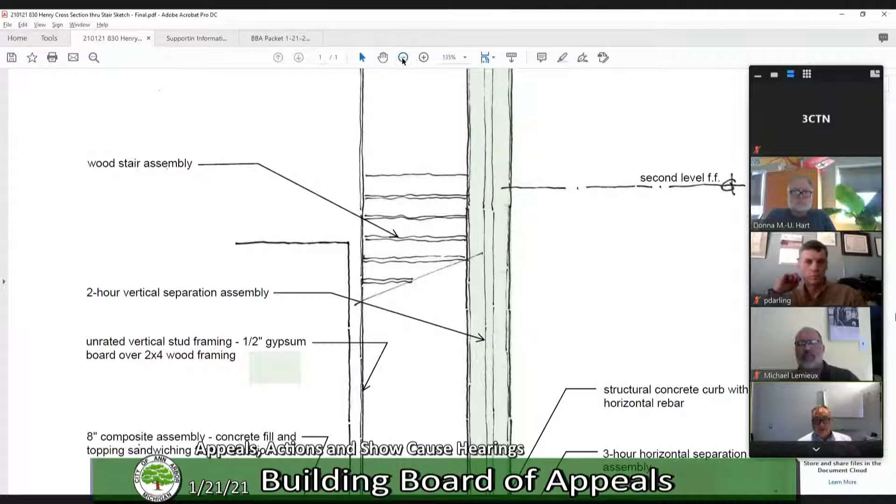Without getting into the rest of the floors or diagrams, we can talk off of this for the most part because it's relatively straightforward. There's a stair on the lower half of the drawing going down to the lower level, which is the basement or garage level of the development. That's where the sleeping areas, the bedrooms of this particular unit, are located. There's 3 bedrooms and a small common area associated with this. The primary egress path is through the stair to the main level. The upper stair goes to a rooftop terrace.

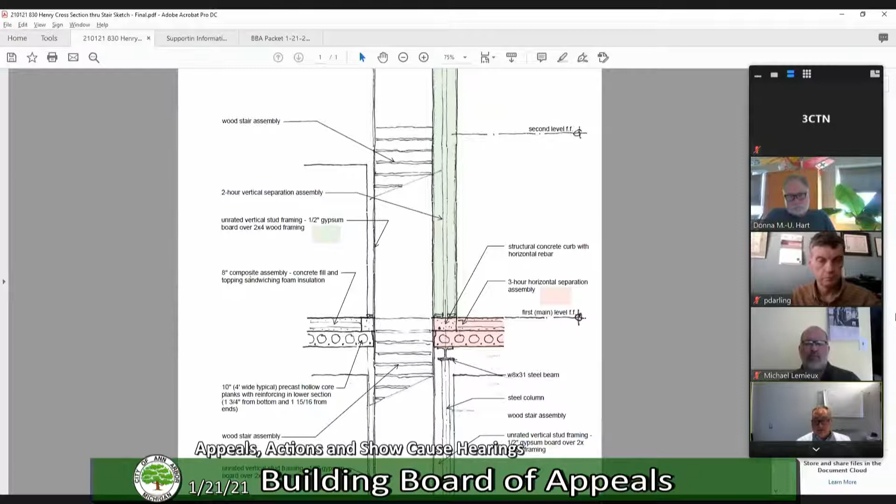Regrettably, both were constructed with incredibly tight construction tolerances, and that's where I want to spend a little time reviewing and discussing them. Basically, this unit is separated from the garage level and upper stories by a 3-hour separation assembly. In regards to the vertical separation between it and the garage, it's a 3-hour cast-in-place wall. In regards to the horizontal separation, it's a 3-hour precast and composite cast-in-place system that in effect creates a fully sandwiched type system.

That's a 10-inch concrete plank, which is the primary structural floor system. The stair basically runs between those planks, and then what we call the topping course—2 layers of cast-in-place concrete which sandwich an insulation layer between them—is spread throughout the entire floor plate system itself.

There's also a curb at either end, both to frame the opening itself and to support and provide bearing components for what you see on the right hand of that image, which is a 2-hour vertical separation assembly—a consistent separation design that separates all of the individual units, including unit 11 in this case, from unit 10.

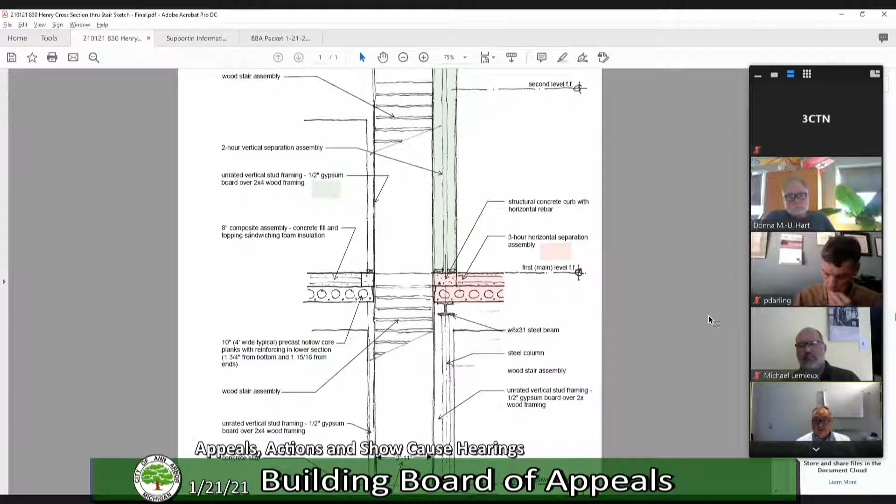On the west side, it's conventional load bearing, but not a rated wall assembly. I want to point out that this building is separated by no less than 2 hours from all adjoining properties or units, as well as the garage. The garage is clearly 3-hour separation.

To support that opening on the east side, there's the weight of the double wall construction, which is our 2-hour separation wall up above. There's a W8 by 31 beam running north to south, and columns to support that. Functionally below that level, these walls are non-structural for the most part, basically unrated framing with half-inch gypsum boards around. The upper level is a load-bearing wall on the west side supporting the terrace up above.

This drills down to the real meat of the issue at hand. The planks are a precast system. I don't know the total count, but it had to be in the hundreds in terms of what was ultimately installed on this plinth or platform that separates the garage or lower level from the beginning of the residential units up above.

This was designed with an opening with a 3-foot finish tolerance. When the planks were laid out, there was minimal tolerance after installation, and we have a condition now that has rendered this 1-inch deficient in terms of the minimum 36-inch width for both the lower level stair and the upper level stair.

We acknowledge the code concerns and the findings. There's no challenge to that effect. What I want to point out is some of the conditions that rendered this outcome. The eastern side is what we term incredibly static, meaning it cannot move based on both the plank condition, the curb condition, and the thicknesses of the walls for the vertical fire separation between those.

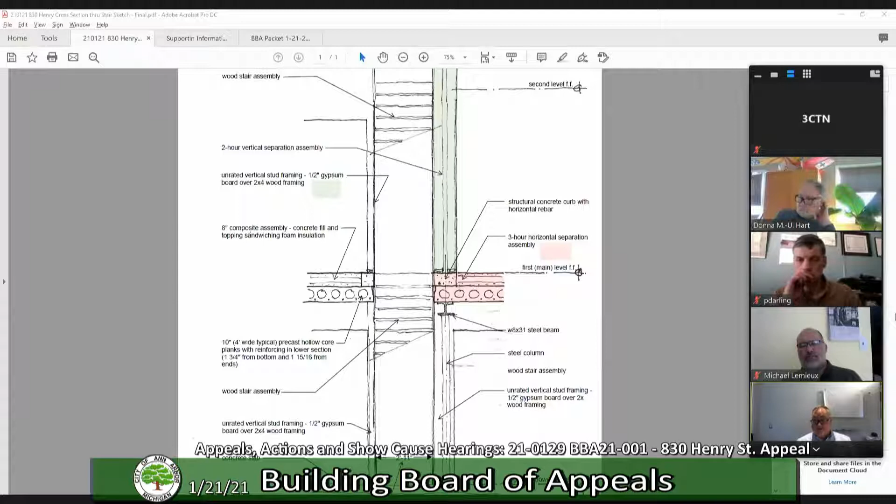Conversely, the stairs coming down from the terrace, I should point out, is for in particular the tenant use, the residential use. It's not a common terrace. That terrace likewise has that 35-inch width challenge, and it's likewise the opposite direction of travel—coming down as opposed to up.

But basically, we have a confluence of our primary means of egress to the main level, where we already have a dedicated single means of egress out of the space. So I can't imagine an emergency situation, particularly from the lower level, where there could be a set of emergency service professionals causing a conflict of two-way traffic on the stair.

I think that is the primary argument we're attempting to make, and speaking candidly as a professional, it is very unique for me to come up with a standard of approval. The one I presented as part of this application was that the provisions of the code do not apply. It was rejected, but I believe there is a tolerance inherently in the code based upon the commentary provided, an understanding if not a true variance aspect, that will allow this accommodation to take place, and that safe egressing of people from both the terrace level and the lower level can be accommodated without any deficiencies by the relatively minimal loss of the 1-inch clear dimension on that stair.

The only element of the residential code I was pointing out was a unique adaptation in the residential code, and it's only brought up for the sensibility that there's an interpretation where we could clinically eliminate, in the residential code itself, or reduce the minimum dimension beneath the handrails down to almost 31 inches, assuming a minimum 36-inch stair.

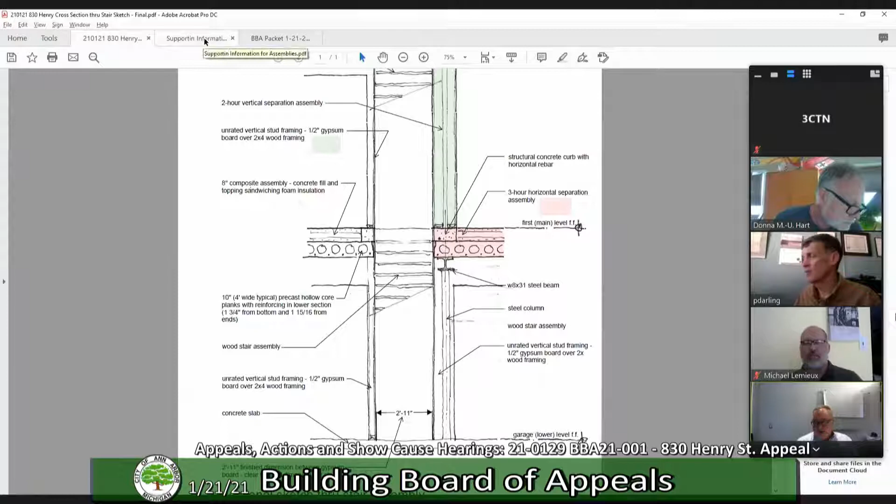Let me flip to that. That would be sheet A401, which would provide the most clarity in regards to that layout. Heidi, could you—basically, because that is a common area, it could be an area where there might be a television, an opportunity for people to just gather, but it would be the same residents as would be occupying the bedrooms. Making sure I'm not mute. Thank you.

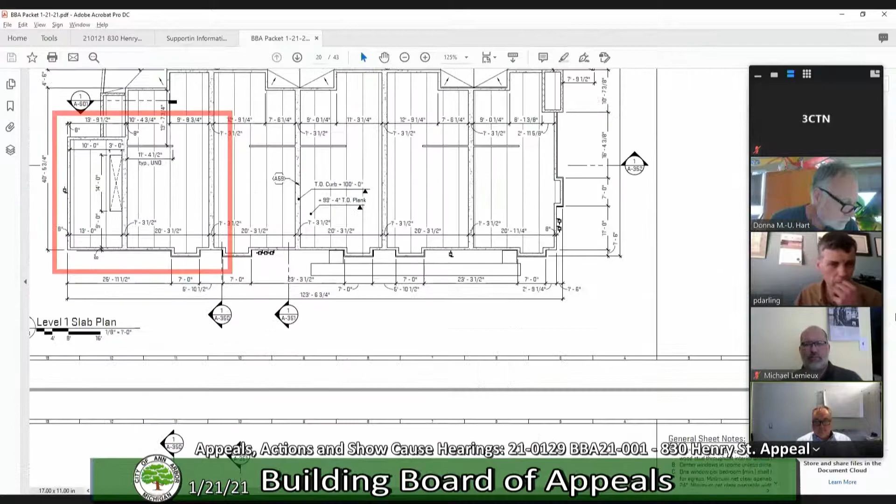If we get to 401 real quick, I believe that'd be part of the packet, please. Thank you. This page, I believe it's this page. Yes.

There's no real pretense behind the sink itself outside of potential use for a coffee pot or something akin to that. Yeah, that was going to be a wet bar at one point. That actually was not—we did not install that. Thank you, Heidi, for clarifying. That was not installed. I was going to ask if you could chime in. Thank you.

So on the same plan, the bottom of the stair shows what looks like 3 foot 4.5 clear. Is that also not the case because that's just not the way it was built? No, if you could zoom in on the bottom of the stair, I can explain the kind of on-the-fly installation that was created. I don't believe that plan took into account the column location, which functionally boxes out some of that stair. That was obviously a coordination issue during the design phase.

You'll see a dash line coming down above the stair. That line is basically a continuation of the partition up above, which forms the east side of that stairway wall. That now continues and actually comes down as handrail height down below.

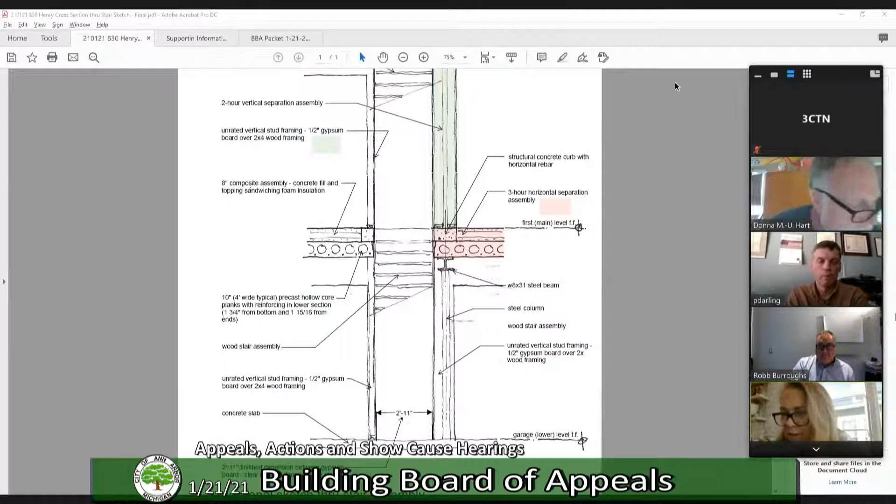It looks like in both applications it says the minimum is 36, depending on what code you're in, it still says 36 minimum, and we don't have that. Rob, is that right? Yeah, as much as I would love to say I have a great alternative argument, the code is very clear, Heidi, that 36 is a minimum dimension. I just wanted to make sure, because I understood the direction right from the get-go, from Mr. Darling, and wanted to make sure we're not working outside of that. Of course.

So one question I have for the building department is the concern within the width of the stair alone. I mean, is there anything else that they can do to mitigate the egress situation in this unit?

I'm a little bit confused as to what the question is. Well, I guess what I'm asking is, if they were to introduce any other means of egress, for example like on the level 1 floor plan, say there was a second door out, would that make a difference? Are you saying like turn one of the egress windows into a proper exit door, maybe?

I'm looking at the back of the stair on level 1, where the bathroom is. Is there an opportunity to put a stair to the exterior at that point? I don't know that there's a code route to get there. I don't know of any allowance to reduce a minimum stair width based on exits. If I'm answering your question.

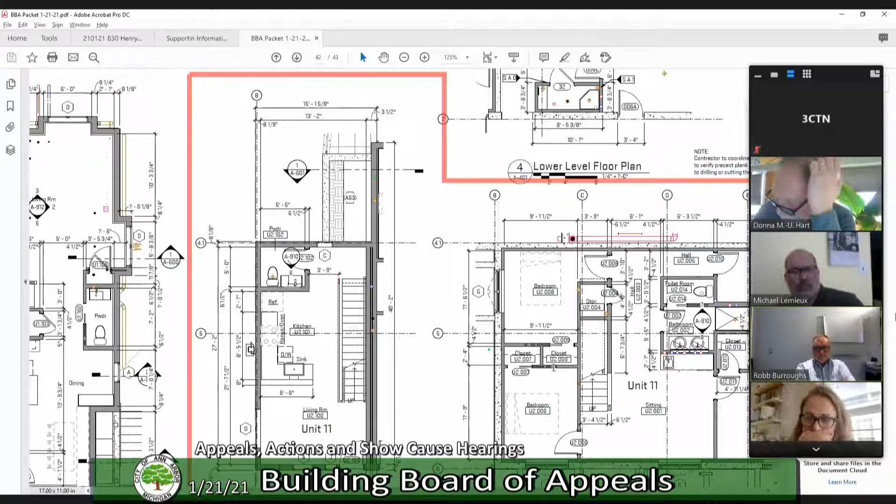I think if the applicant wanted to propose something else as far as an alternate form of construction, that would be fine. I don't know if it's the board's action to come up with a solution to solve the problem of the lack of 36 inches. We don't want to propose something outside the purview of what the building department would feel comfortable approving. We have the option to table this if you want to come up with more options, or we can make a motion now and vote on it.

So there's a couple ways we could do it. If you want to explore other options to improve the width of the stair or egress, you can do that. I think the next meeting would be in a month. Or else you're going to go to the variance to the state, or you can reapply with another variance to the city if we took action today.

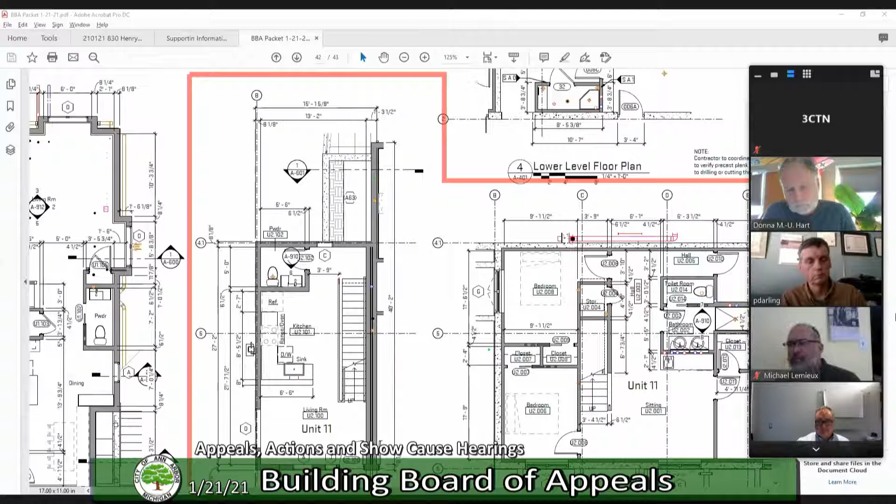Well, not to make the sausage in front of all of you guys, but just netting it out and listening to your guidance in terms of where you have capabilities and where you don't, I don't think that we've made an argument that allows you to say yes.

So I think probably, Robb, what we should do is table this, hoping that we can explore with, for example, Mr. Lemieux, whether adding another means of egress to where that window is makes the staircase now some kind of almost auxiliary, third way out, as opposed to a primary way out. Does that make sense?

It does to me. Yeah, I mean, I would need to be presented with a code path that gets us there. So I would need to be shown through the code language how we get from that exit to a reduction in a stair width.

Yeah, I mean, we definitely want to make the investment in making this right. We're in no way coming here saying, hey, it's only an inch, so can you be flexible? I know you can't. But maybe what we can come up with you, Michael, since I have you here, is come up with a second means of egress for that main floor, and then maybe even a door possibly in the basement, so that there's a primary, and then in that sitting room area, and then there's a second means out of the bedrooms through the egress windows.

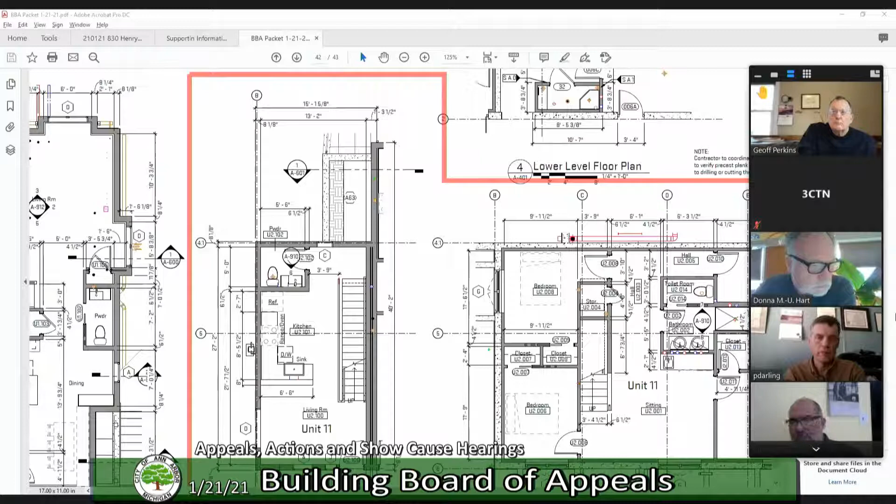Now, are these buildings sprinkled right now? Are the units fire suppressed? They are. There's every form of fire suppression man has thought of in these units. There's DensGlass, there's sprinkling. We're fire rated, fire suppressed, 3 hours between fire collars everywhere, paid attendant standing by with a hose, the whole nine.

So sometimes we'll see that you're providing an additional level of protection that wasn't required to help you compensate for this, but if it's already required to be suppressed, you wouldn't get that benefit. Right, and I think that's where the hybrid commercial residential interpretation really came in. If these buildings weren't sitting on top of a garage, which we had to build because we needed parking, then all of this extra that we put in would be over and above. And we still have the plinth separation, which is huge, and all the fire collars that go through. So I guess we could add that in as some supplemental encouragement.

But you're right, I don't know that it gives us extra points in the argument. If it's required anyway, it's not supplement, it's not in addition to what is required. It's if there are things that we want to do.

If you wanted to look at ways to move that wall over, make the wall thinner, the non-party wall, if you've exhausted those options to take the finish off or something like that, that would be good to know.

The question is, can we safely get there and meet your requirement? Like you said, you don't have the option to just waive it. So I don't know if getting to 36 is a problem. If you get to 36, you wouldn't need the variance anymore. So if you can get to 36, that's ideal.